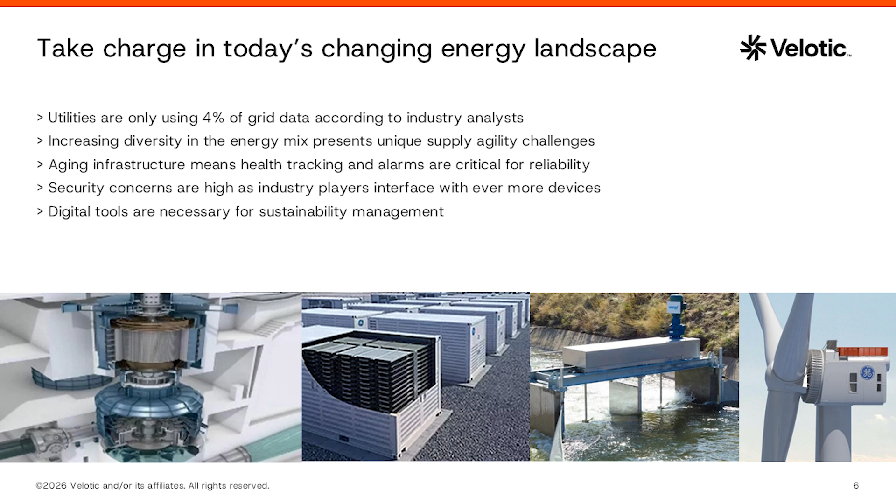Security, as mentioned, is key. Also, the ability to be agile when interfacing with all those systems. As mentioned, more and more systems are coming online, and more power producers are looking at how to get a holistic view of their system, especially being able to operate things remotely or, in some cases, do control remotely. So visibility is really key to that.

Getting to the stability and maturity of those platforms is really going to help with that, continuing to stay up to date. As mentioned previously, there's a lot of aging systems out there. I think now more than ever, there's pressure on operators using legacy systems to really move them forward.

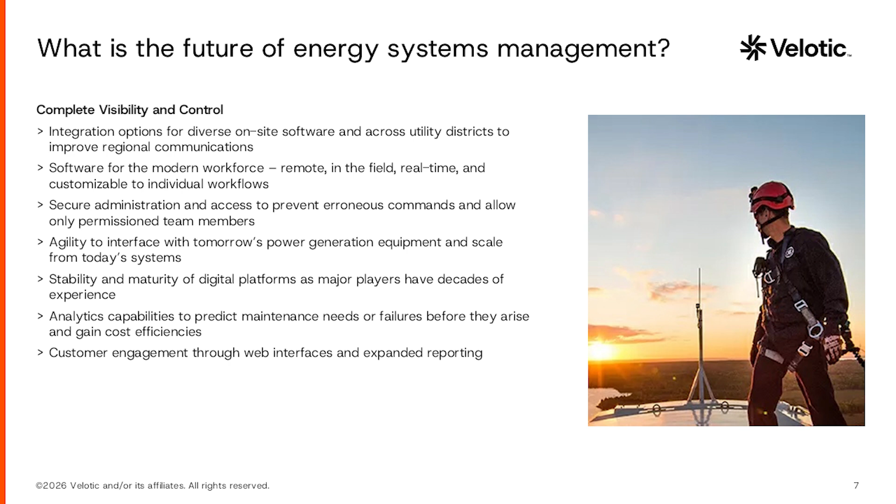So now we'll take just a quick look. As mentioned at the beginning, we have our partners from Catapult on the line, and they're going to talk a little bit about iPower, which is one of those enabling technologies that's really going to help you get visibility into either your energy production or energy usage. So what is iPower?

Ultimately, as I mentioned, we're in the automation business. We do have HMI SCADA solutions used across various industries, including power, facility management, energy management, manufacturing, and much more. So those tools are great, powerful, general purpose SCADA systems. What iPower does is provide a set of tools that complements the HMI SCADA solutions to really help accelerate the time it takes to build and ease the maintenance of your systems.

So I'm not going to go through all of these, but ultimately it's really about providing the controls and the tools that are required to help build and maintain those applications quickly and easily.

So, looking at some of the advantages, it does provide a secure and consistent control interface. There are some tools out of the box that really help make sure the interface is consistent regardless of which system you're looking at, whether you're looking at multiple systems or even across different assets within your system. The idea is that consistency is really helpful from a safety and security perspective.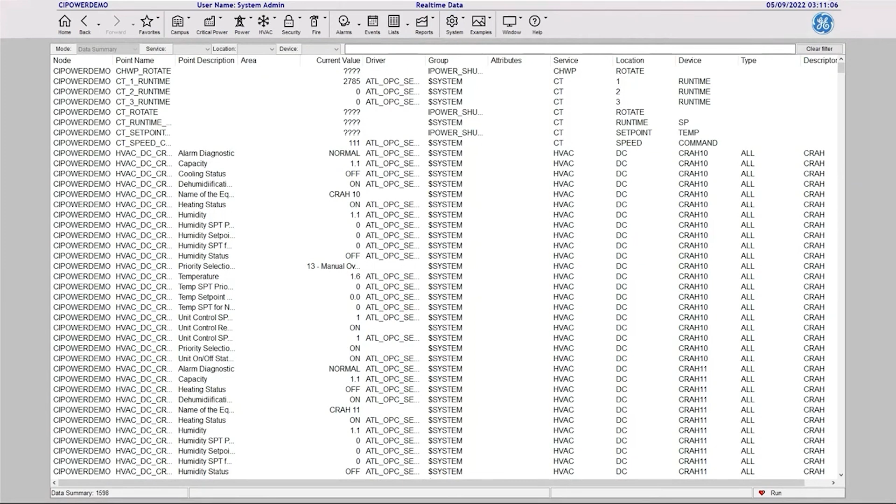So as you can see here, we've been using the menu above to navigate between the different pictures, and this is actually the iPower main navigation menu. It's an out-of-the-box and complete navigation system, which means there's no coding needed to gain the required functionality. By default, the menu includes standard functions like back, forward, home, and favorites, though it is completely user configurable.

Users can navigate to any picture or configuration tool, such as Database Manager or Mission Control, as long as they have the correct access level, of course.

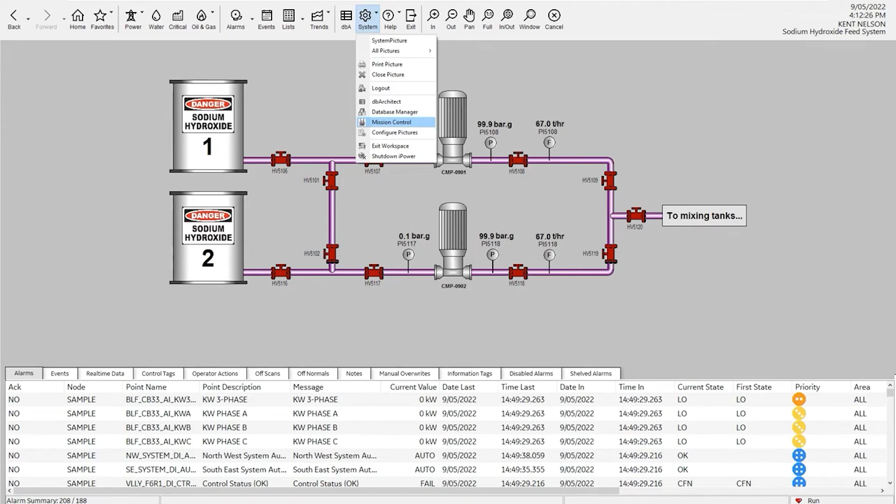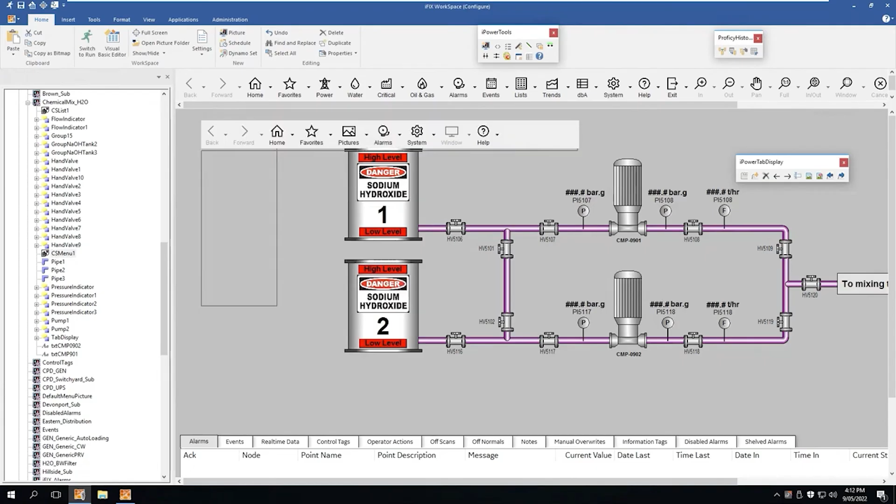So let's go to Configure mode and have a look at how to create and configure a menu. Creating a menu is easy. You just need to add it into an existing picture from the iPower toolbar, and then position and resize it as needed. Note that you can display the menu either horizontally or vertically, depending on your requirements.

You can make changes to the menu by right-clicking on it and selecting the Menu Properties option from the pop-up menu. From here, you can set a number of options. You can define several submenus, which you can then attach to a menu button, and then change the layout of the buttons on the menu. Finally, you can change generic properties, such as the default picture to display when the menu launches, or whether to display buttons as text only, image only, or both.

Note also that iPower already provides some of the most common actions as pre-configured options, which can be attached to either submenus or buttons. However, if the action you need is not in the list, you can also create custom actions using VB scripts. Each action can also be tied to either the iFIX or CIMPLICITY security system to make sure that only users with the proper credentials can access these actions.

So here you can see one way that iPower makes it easier to implement projects. Navigation tends to be one of those parts that can be costly in terms of design and implementation. But because iPower's menu is available out of the box while being highly configurable, you can spend significantly less time on design and coding. Plus, you get the added bonus of a secure and consistent menu system, helping you to cut down on user training.

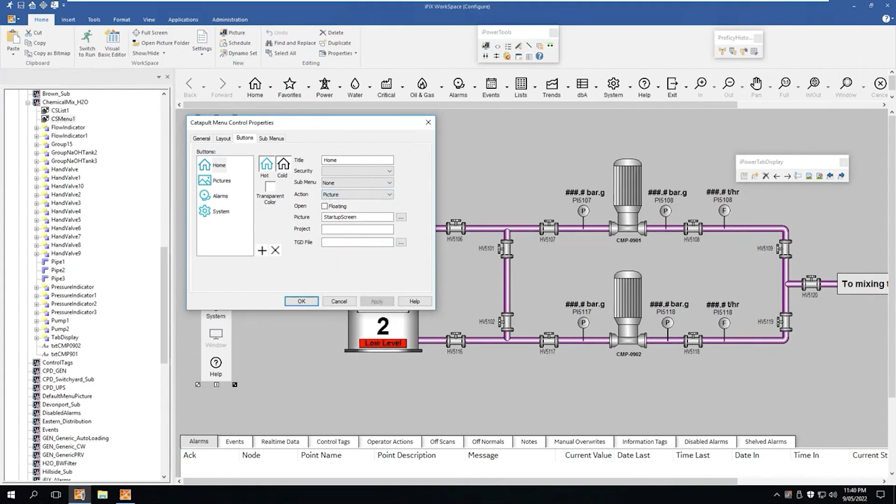So that's an overview of the menu navigation tool provided by iPower. Now let's have a look at another feature, which are the list controls.

So the list control is an object that you can add to any existing iFIX or CIMPLICITY picture. It provides a summary of various tables of data presented as a list. The most common forms of the list are the alarm summary and the events list, but you can also use the list control to display disabled or shelved alarms and even a real-time data summary list.

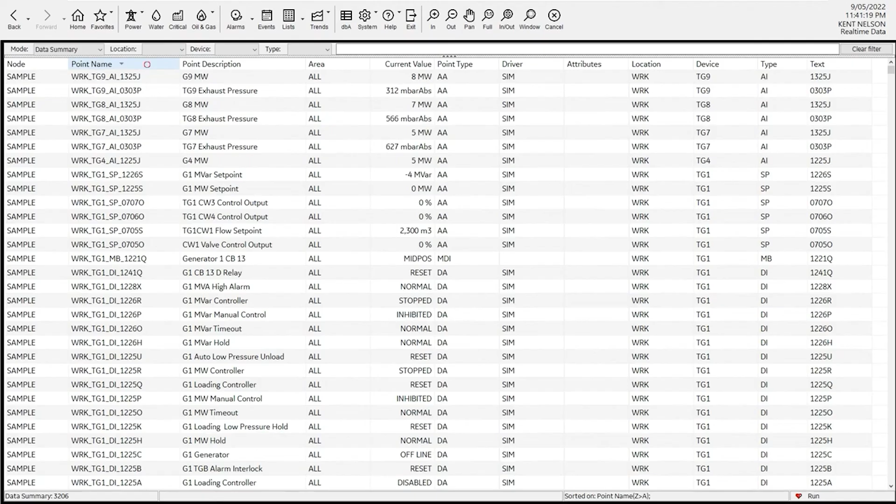All lists have common features between them, such as the ability to create a filter or do advanced sorting on multiple fields. So for example, this data summary is a list of all the points in the SCADA database. As you can see, it can be very hard to look for a specific point, but I can use the quick sort feature to quickly reorder the list, or I can use the advanced sorting feature to sort on multiple fields on a priority basis in either normal or reverse sorting order.

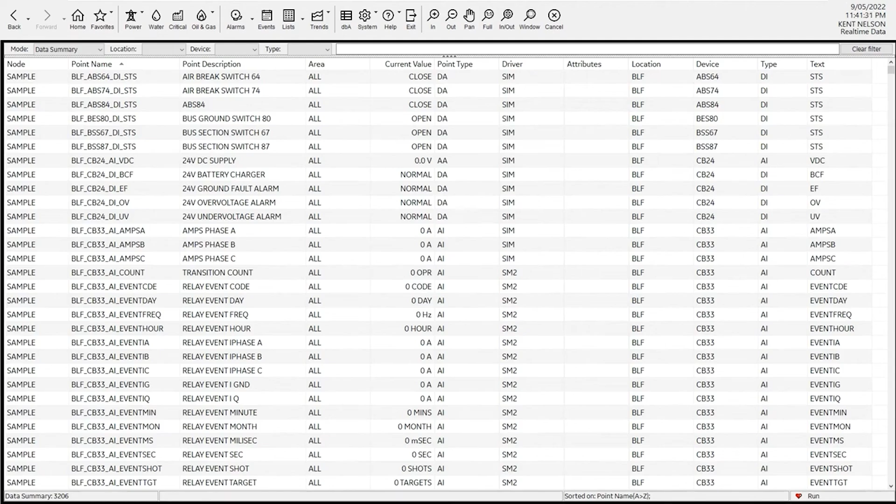Even better, I can use the quick filter controls on the banner at the top to quickly drill down to a specific set of points. For example, if I just wanted to concentrate on the water treatment system, I can use the filters to quickly go to those database points without having to create a query command, making it easier to find points of interest.

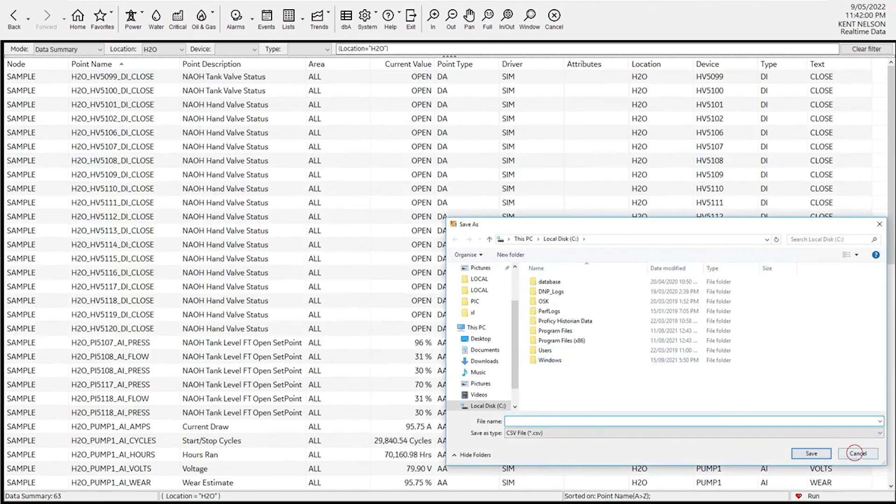You can also make a selection of items in the list and either send them to a printer or export them to a CSV file, which can then be used in other reports. There are other special options available depending on the type of the list, which we will be showing later.

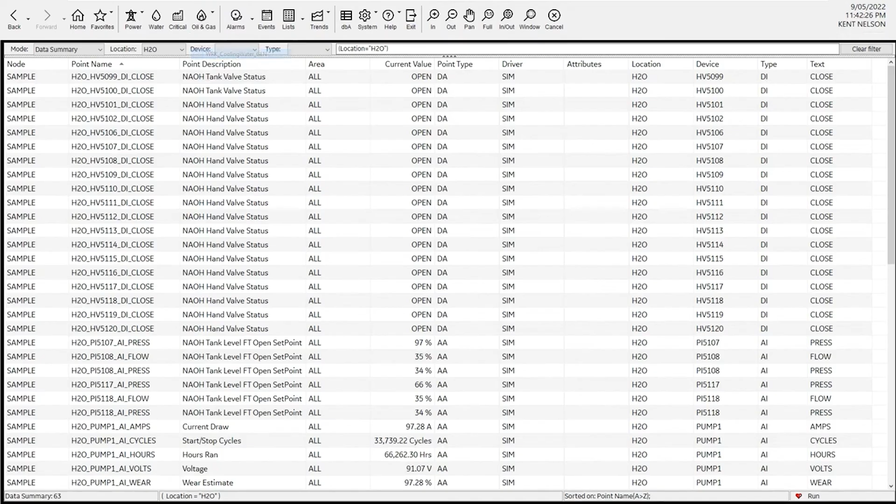Now let's go into configure mode to see how to create and configure a list control. Just like with the menu, adding a list to a picture is easy. To add a list, you just need to select the Insert List option from the iPower toolbar, and then resize and position within the picture as needed. As you can see here, I can resize it to either occupy the entire screen or just shrink it down to a small banner.

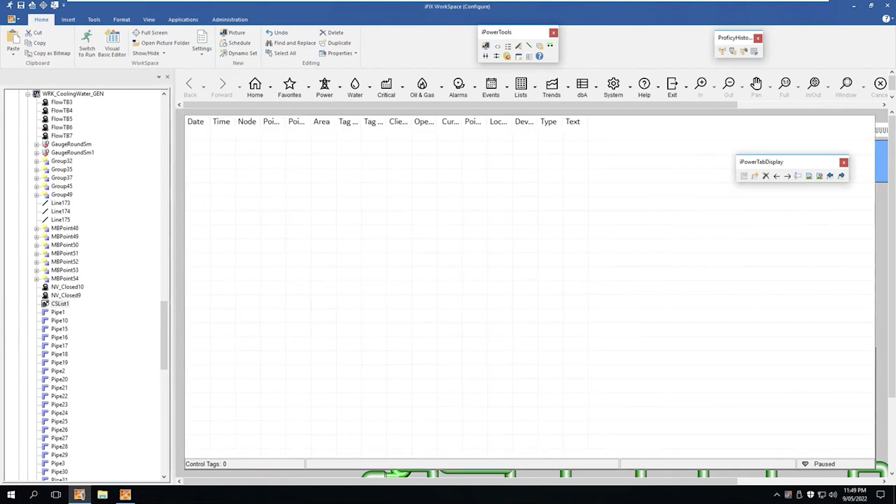Just like with the menu, you can also set the properties for the list by right-clicking on it and then selecting the List Properties option from the pop-up menu. Note that there are a number of options that can be set, from the type of the list to display and the sorting order used, to displaying options such as the quick filter buttons.

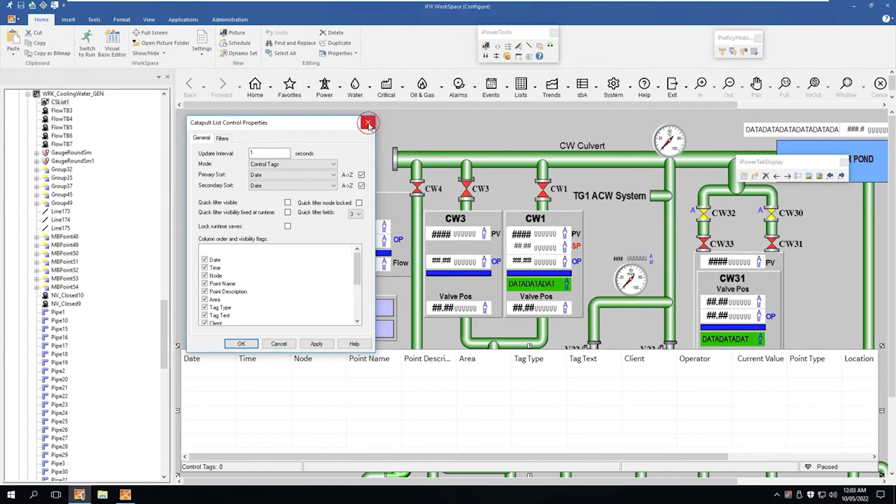So now let's have a look at two of the most common forms of the list and see how exactly it can help you to manage your SCADA systems.

First, let's focus on the events list, which provides a summary of all the events within a SCADA system. This includes all active alarms and other system events such as operator controls, logins and logouts, and startup events. As such, it's a great way to audit your SCADA system.

There is a special feature unique to the events list that helps with system audits: the ability to add comments to the events list, which comes in two forms. The first is an operator message, which allows an operator to insert a message into the events list. This is useful if an operator wants to broadcast a message.

So for example, if an operator wanted to warn of an impending reboot of the system, he could create a comment like, 'System shutdown in 5 minutes.' You'll see here that the comment is displayed on the list, adding information such as the name of the operator that made the comment and its date and time.

The second form is an event comment, which allows an operator to add a note to a specific event in the list. These allow an operator to make relevant comments to events as they happen, rather than having to remember months down the line during a system audit.

So for example, if an operator has knowledge of the cause of this alarm, he can comment on it by right-clicking the event, then creating the comment. You can then see that the comment has the same date and time as the event, making it easier to determine which event was being referenced.

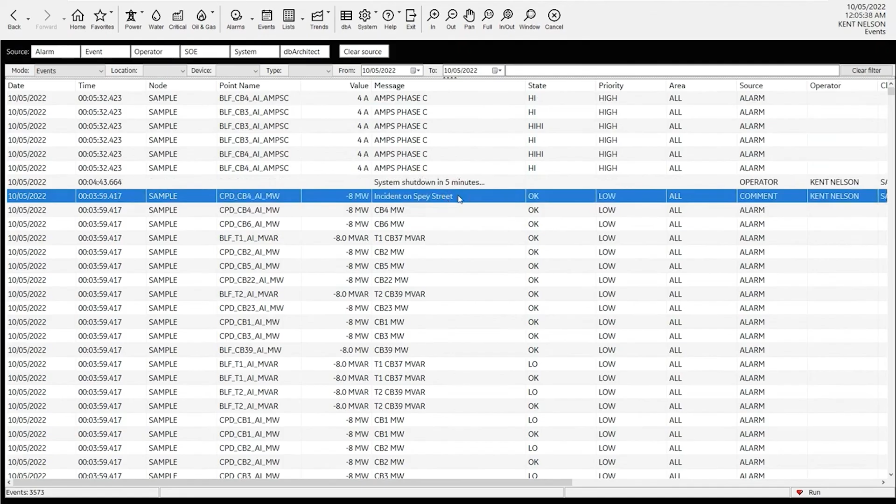This makes auditing a system not only easier, but more relevant and reliable in the information it gathers, saving on man-hours when trying to determine the cause of a specific system event. So that's an overview of the events list. Now let's focus on the alarm summary list.

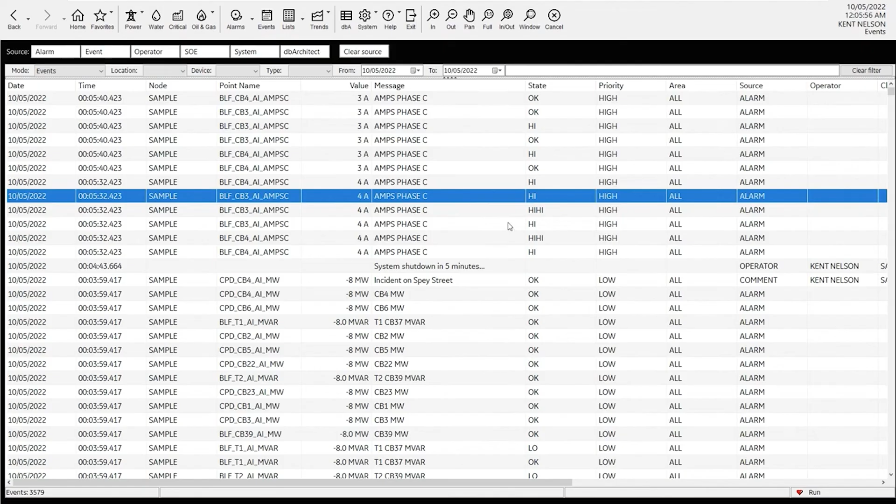So this is the iPower alarm summary, which provides a list of all the active alarms within a SCADA system. It's a great tool for managing alarms and provides a number of features, such as the ability to quickly declutter the list by using the quick filters.

The quick filter and sorting options available within the list controls are very useful, as with just a few clicks, you can very quickly condense it to display only the most important alarms. You can zoom into a specific area and then filter based on an alarm priority, and then just as easily clear the filter.

This feature is vital to alarm management as it minimizes distracting or nuisance alarms to operators, allowing them to easily focus only on the most critical alarms.

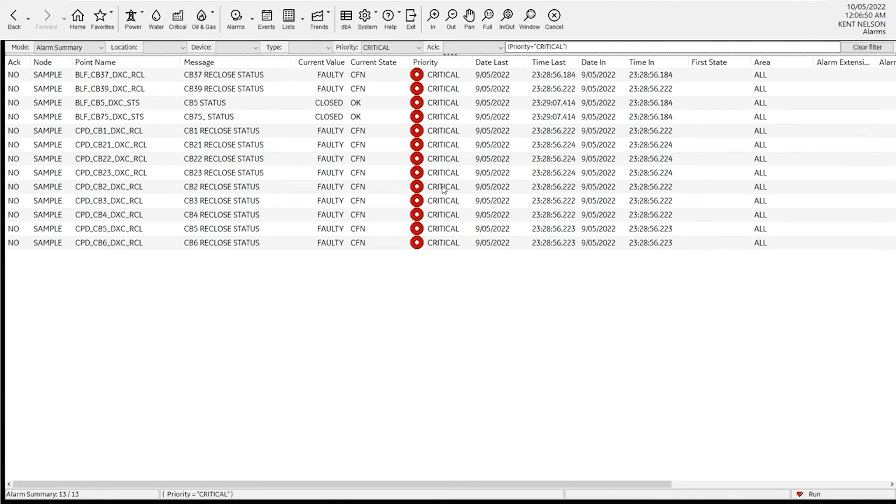You can also right-click on the alarm summary to access the iPower pre-built menu. Here you can acknowledge or shelve individual alarms. More importantly, you can also perform these operations as a batch.

So for example, I can select a group of alarms here and acknowledge them, or select all of these alarms here and shelve them all. These operations also work in conjunction with the sorting and filtering options for the list controls. For example, I can filter to just the high priority alarms, and then perform a batch operation on a selection of the alarms from the filtered list.

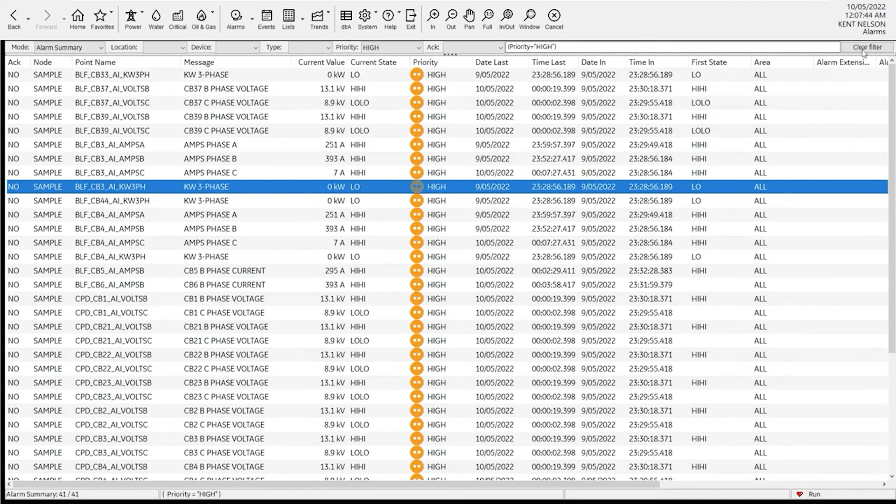So here you have an example of how the alarm summary list from iPower can very quickly help you to manage a cluttered alarm system with just a few clicks, allowing you to focus on more important operations than just acknowledging alarms. So that's an overview of the list controls from iPower.

Now let's have a look at the secure control dialogues. iPower provides a universal control dialog that is secure and consistent across the entire platform.

This means that no matter where it is invoked, whether from a device dynamo, or a list, or a script, the control interface is always the same, which makes it easier for operators to learn. The controls are also secure, and only one operator can access it at any given time to prevent conflicting controls. The dialog also times out at a configurable time to prevent any one operator from indefinitely locking out a device.

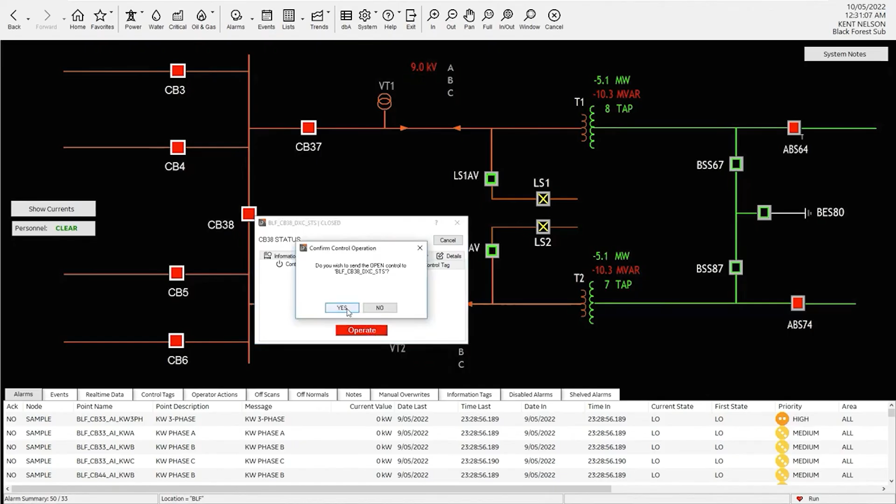As you can see, there are a number of tabs available within the control dialog. By default, the control tab is always the first tab displayed, and this is the main interface for sending controls in iPower. Sending controls in iPower is a three-stage process, which helps to minimize accidental controls from being sent. The first stage is selecting the control, the second is clicking the operate button, and finally, you confirm the control to send, though the final stage is a configurable option.

iPower also provides a number of methods for managing when controls should be sent out. The first is the control tag, which is a manual lock applied by the operator to a device, preventing controls to it. So for example, if we knew that the circuit breaker was being serviced, we can put a control tag like this to show that operators should not send any controls to it.

The next time anyone on the network tries to operate the device, they'll see the control tag applied, and note that they no longer have access to the control dialog until the control tag is removed.

There is also a less restrictive version of the control tag called the information tag, which serves more as a warning to operators rather than as a lock. For example, if I noticed that this device was giving me faulty readings, I can apply an information tag to it like this.

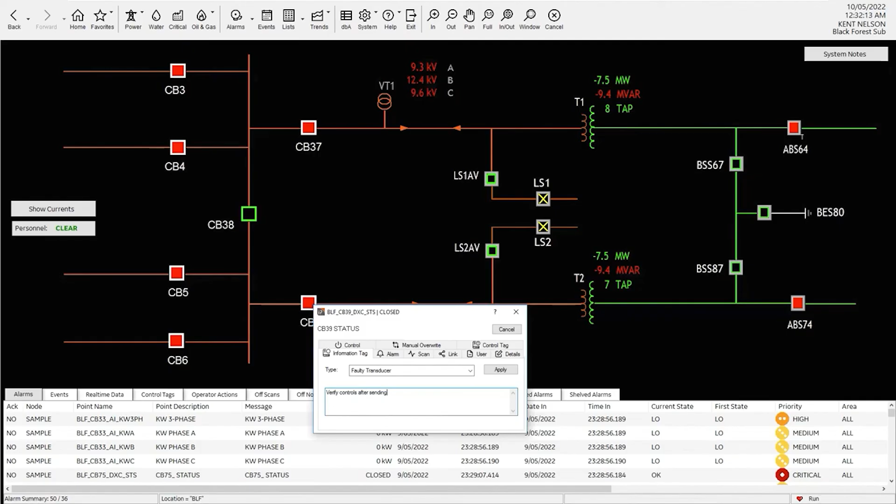And now, anytime an operator tries to control this device, the first thing they'll see is the information tag. But unlike the control tag, they will still have access to the controls dialog after they've seen the warning.

Note that both control tags and information tags have their own lists, and this is a great way to manage what tags have been applied. You can have a system-wide list of tags, or you can have a list that's specific to a location.

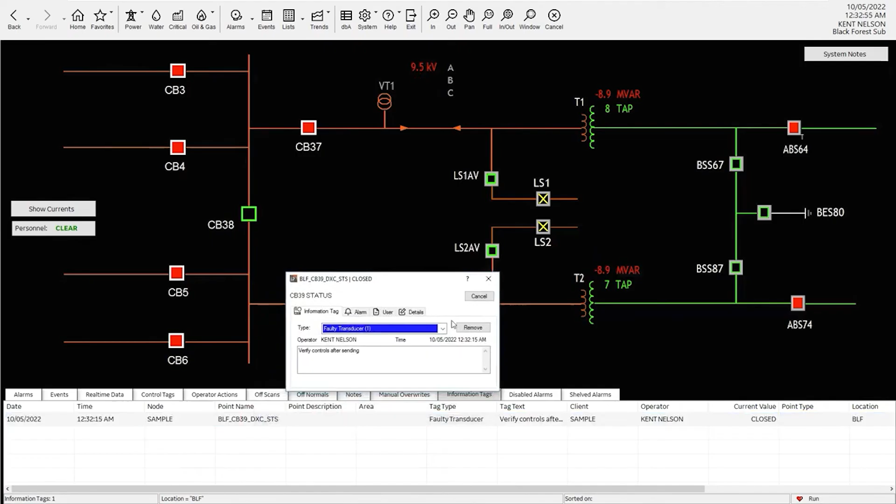Regardless of how it's applied, you can actually remove any applied tags from the list itself by double-clicking on its entry. So for example, from this list, I can remove the information tag we've just applied, and when I now click on the device, it's back to normal operation.

Also, as a side note, all of the operations that we have been doing are all being logged in real time in the events list, including operator names and timestamps, which again helps greatly with auditing a system.

Aside from the control and information tags, iPower provides a third option, which is the control interlock, which is an automatic lock applied to a device based on conditions within the SCADA network, as opposed to the manual nature of control and information tags. Let's move to the CIMPLICITY system to demonstrate this feature.

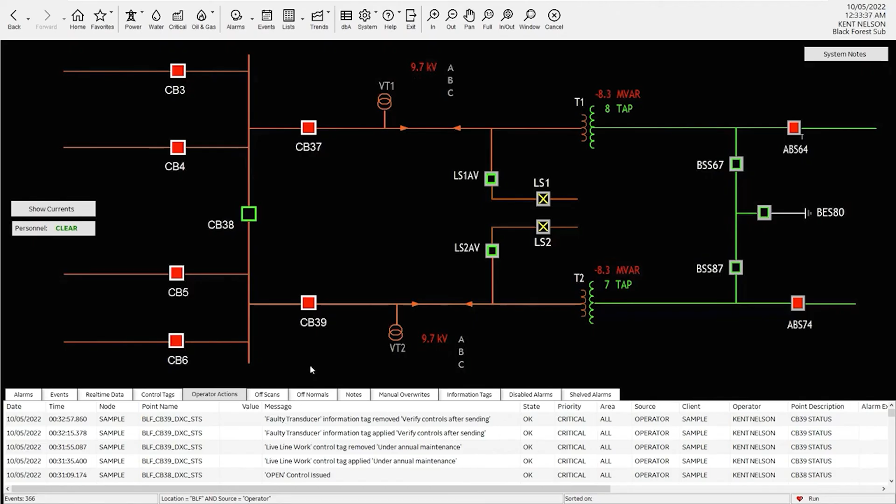So here in the CIMPLICITY demo system, we have a similar substation diagram to the one we've been using in iFIX. We have the familiar control dialogues as well as the lists, and if I try to control this device, I can send an open control without any issues. However, if I try to send a close control, you'll notice it gives me a message saying that it cannot perform the control because of an existing interlock.

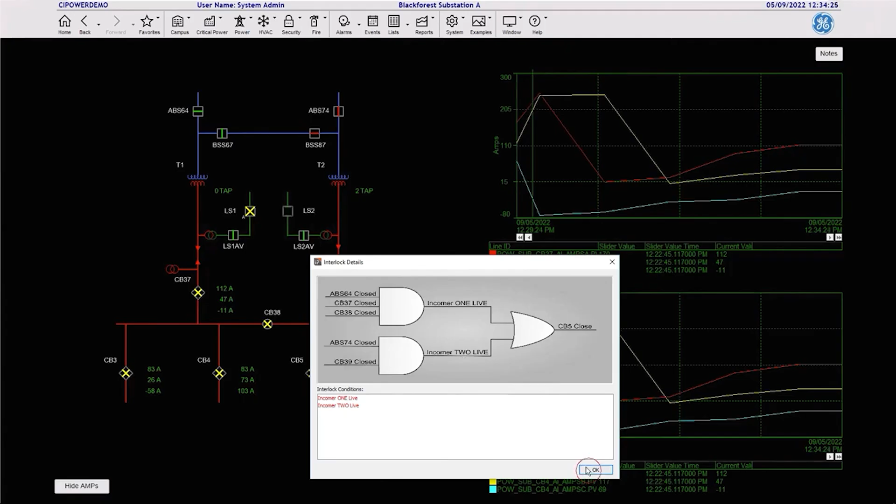If we want to see the details behind that interlock, we can click on this button here, and it gives us a diagram showing that in order to close CB5, either incomer 1 or 2 need to be live. In terms of the substation diagram, it just means that either these 2 breakers need to be closed, or these 3 breakers should all be closed.

So let's try to meet the conditions of the interlock. If I close the circuit breaker here, this should now allow us to send the close control to CB5. So if I retry the close control, you can see that the interlock is now gone, because we have met the conditions necessary to send the close control to CB5.

So here you can see just some of the tools provided by iPower to not only make control systems more secure, but it allows you to add intelligence to the management of the SCADA network, allowing operators to be more efficient in their day-to-day tasks.

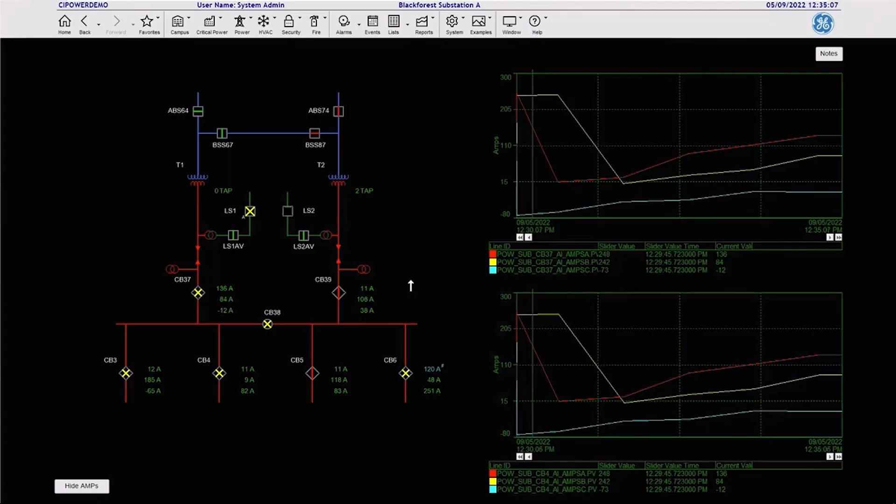In addition to secure controls, iPower also provides a number of tools within the control dialog. These include such features as manual overwrites, which is useful in situations where the reported value of a point is not the same as its actual value in the field. A manual overwrite will allow the operator to forcibly correct the value to match the actual value in the field, providing a more sensible and consistent display.

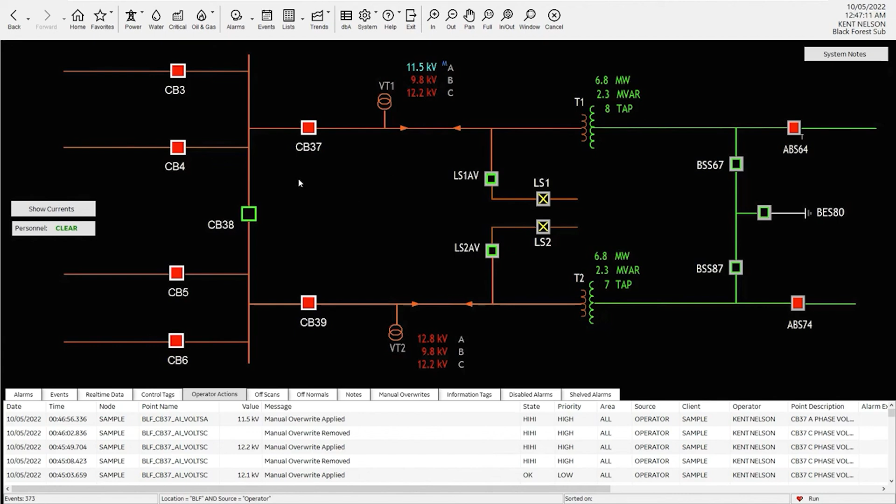iPower also provides the ability to manage alarms from within the control dialogs. From the Alarm tab, you can acknowledge an alarm or even pre-shelve it. Normally, you can only shelve an alarm once it has occurred, but in iPower, you can proactively shelve an alarm. For example, if I know that this device is soon going to undergo maintenance for the next 2 hours, I can shelve it now before it generates a large number of nuisance alarms. This way, once the maintenance work commences, the alarm summary is not cluttered with an alarm flood.

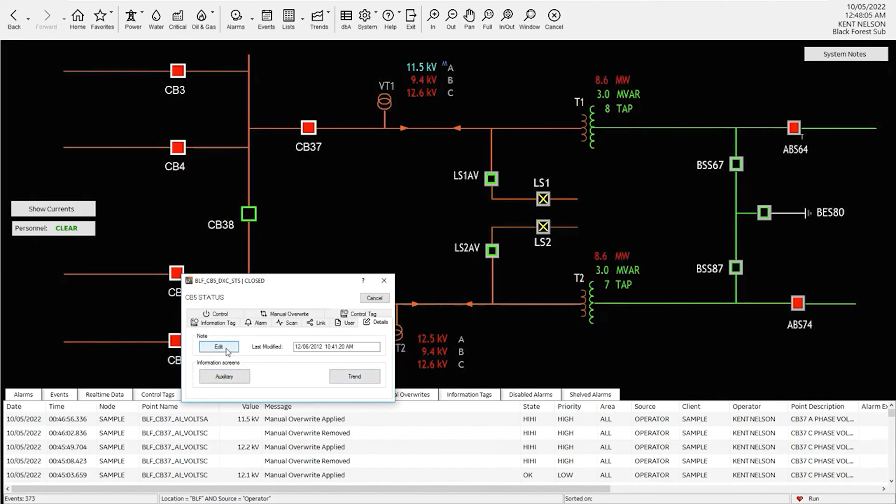Finally, there are a number of reference tabs that can be used to provide additional information to the operator. You can review switching information and I/O addresses for related database points, which are handy during commissioning work. And there are also options for displaying basic trends, auxiliary screens, and even create a note for the device. Notes are a handy way for operators to make comments about the device, which are kept in a handy text file, complete with its own version history. Operators can use this to keep track of maintenance schedules, or even just as a general record of faults observed with a device.

As you can see, the control dialogs not only provide robust and secure controls, but a host of other features that operators commonly use. Best of all, these features are all available out of the box and do not require any additional coding, allowing you to concentrate on more important tasks from the get-go.

Next, let's have a look at the display management features available in iPower.

iPower also provides options for managing multiple displays. You can arrange the pictures on a display according to various arrangements: tiled, horizontal, vertical, and cascading. This feature makes it easy to view multiple pictures across a single monitor, especially on a large screen.

If your SCADA client workstation has a grid of monitors, for example a 2x2 grid, there's also a feature for multi-monitor displays that allows you to send a picture from one monitor to another in the grid, using the Send To controls available from the right-click pop-up menu.

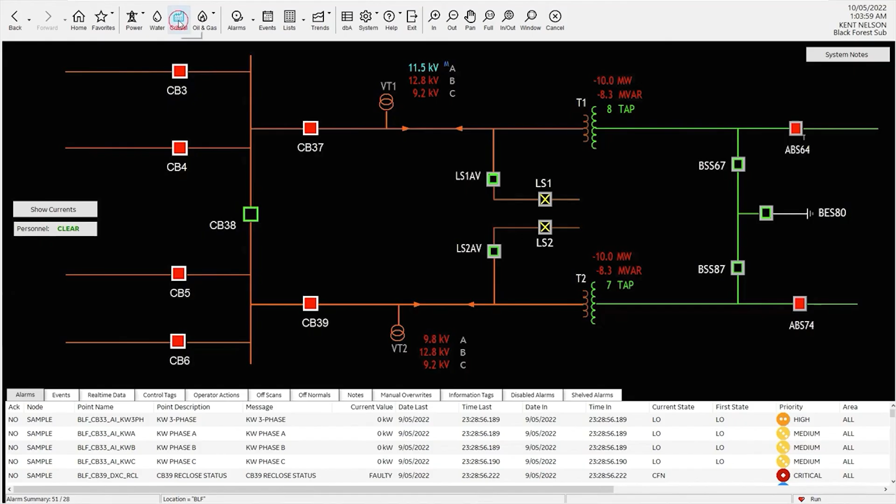Finally, iPower provides an auxiliary screen that allows for the display of multiple information tabs, appropriately called the tab display. Every tab contains a single display, meaning that anything you can put in a picture can be placed in one of these tabs. In this example, the first tab contains a faceplate of the device, while the other tabs contain an alarm summary, an events list, and even a trend picture.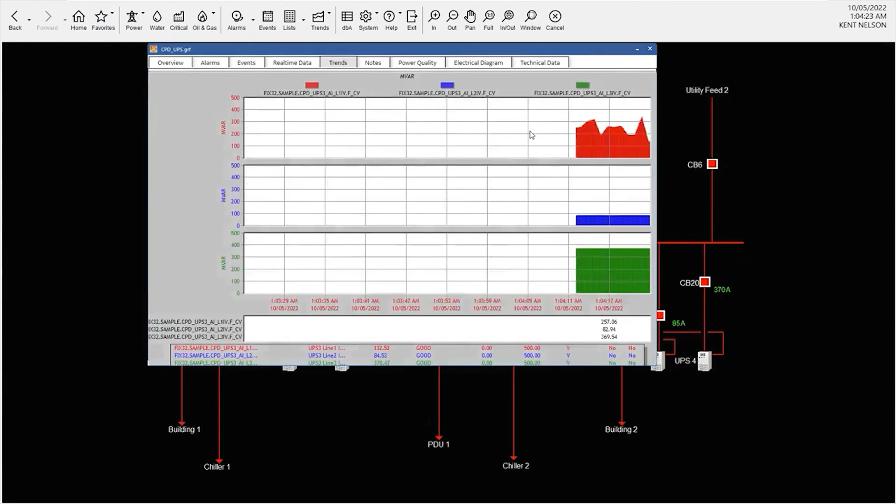Now let's have a look at some of the deployment features available within iPower. In addition to its runtime features, iPower also provides a utility to aid with the configuration and deployment of projects.

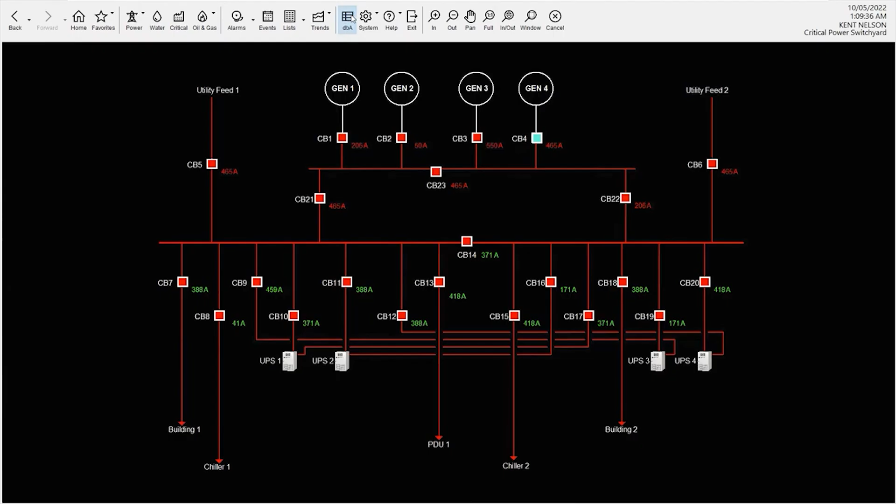This utility is called DB Architect, which is available from the main menu. DB Architect is a database management tool that aids with the rapid deployment of a project by allowing you to create templates from existing objects within the database.

For example, if we wanted to replicate the circuit breaker, you would first create a new template for it, then create the new blocks from that template.

First, let's create the template from the circuit breaker. You simply right-click on the device required, then select the Create New Template option from the pop-up menu. You then give the template a name and other useful information such as a description and the name of the author. Once you've defined these, click on Apply and the new template will be created under the Templates tree.

Once you've created the new template, you can now create new database blocks simply by right-clicking on that template, then selecting the Create New Blocks option from the pop-up menu. You can now specify where the new device will be located, and for this demo, let's place the new data blocks in a different location.

You can also specify changes to the I/O addressing of the new data blocks. You can either choose to place them in a different RTU, a different OPC server and group, or simply offset them from the existing I/O addresses.

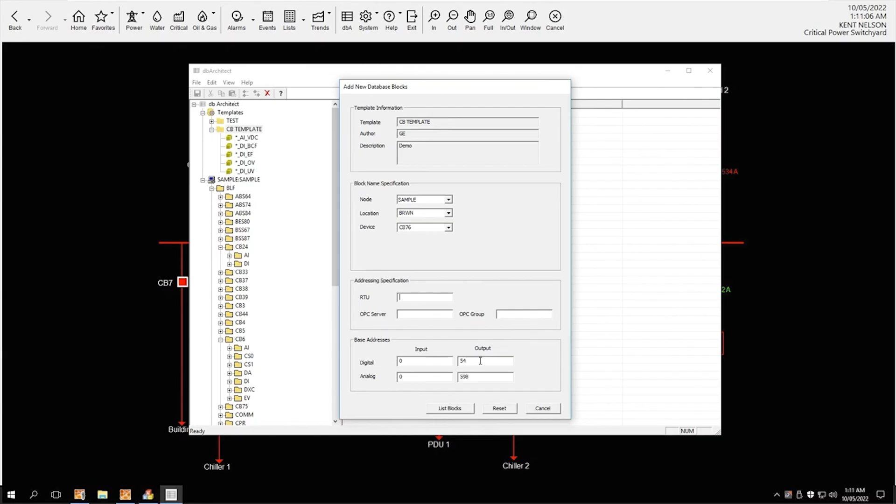After that, you can now click on the List Blocks button, and DBA will provide you with a list of the data blocks that are about to be generated. From here, you can still choose which data blocks will actually be generated, and once you're happy with the list, you can click on the Generate button to start creating the new data blocks.

Once it's finished, we can now have a look at the system tree for the brown substation, and from there we can now see the newly created data blocks.

Aside from templates, DB Architect allows you to manage the SCADA database in a more organized manner than just a flat spreadsheet. As you can see here, the database is presented as a hierarchic tree, and you can double-click entries on the branches to bring up the familiar database editor dialog.

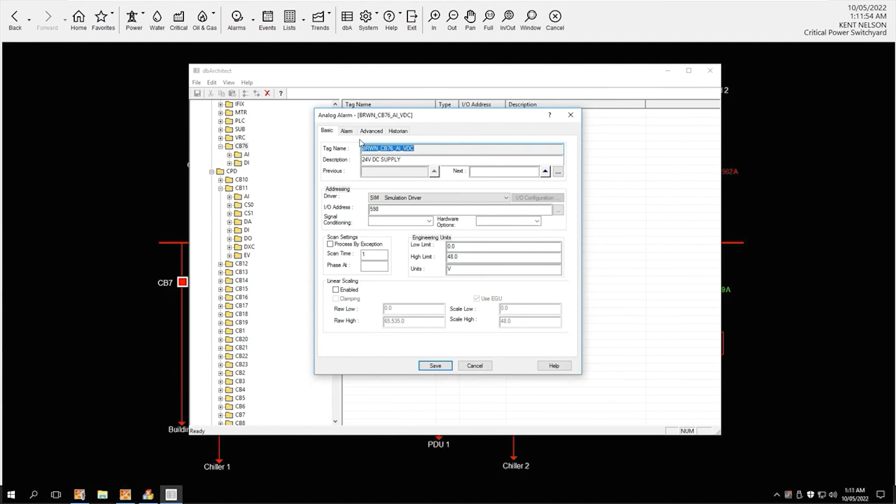Note also that you can create a template from any level of the tree. For example, you can create a template for the entire substation by just following the procedures I've just demonstrated.

So with DB Architect, creating new data blocks is not only quicker, but it's also less error-prone than using an I/O schedule, as the process is largely automatic and allows you to leverage your existing devices to serve as templates for new ones.

So in this demo, we demonstrated some of the features that are available within iPower. I hope I was able to show you not only how easy it is to use iPower, but more importantly, how it can help you through all the stages of your SCADA system lifecycle.